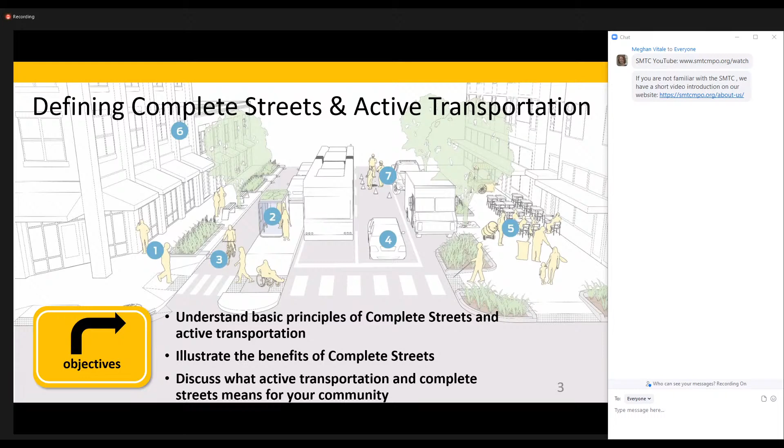To kick things off, let's talk about some definitions here. So what is active transportation? According to the CDC, active transportation is any self-propelled, human-powered mode of transportation, such as walking or bicycling. Now, this is a pretty straightforward definition, but what's interesting about it is where it comes from.

This is coming from the CDC, not the US DOT or New York State DOT, but the Center for Disease Control. And the reason that the CDC is interested in active transportation is because physical inactivity is a lead contributor to many chronic health conditions in the United States, including obesity, diabetes, heart disease, and stroke. Active transportation is a potential solution to mitigate some of these issues.

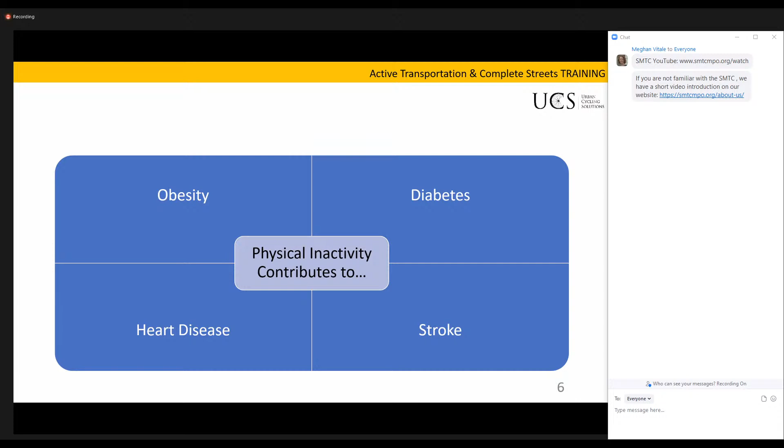If we look at that data, the New York State Comptroller actually did a study of this in 2011 and found that the cost of childhood obesity was calculated at $327 million in associated medical costs. And for adults, that number was $11.8 billion annually in associated medical costs.

And the reason that I bring this up in particular is because sometimes I go to communities and they say, oh, this stuff is all well and good, but we don't have the money. When you see numbers like this, when you see this kind of spending, I say we can't afford not to. And as you'll see later on in the presentation, there are many ways to implement Complete Streets with little to no additional capital cost. So these things don't need to be expensive.

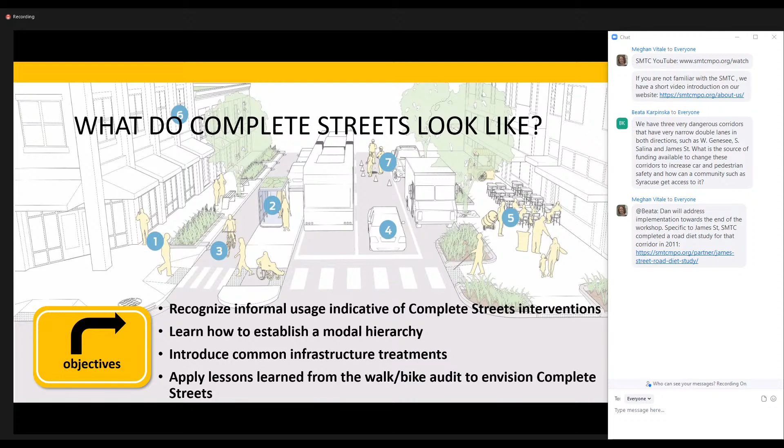So now we're going to shift our conversation from the broad, what is this, to design, and talk about what complete streets actually looks like. So to start things off, before we even get to our menu of design tools, we need to think about how we go about figuring out what that design should be.

If we're thinking about planning a bike network, bikers are very good at finding the path of least resistance and finding comfortable routes. So if you're thinking about a bicycle network development plan, you should talk to your cyclists and understand where they're riding and why.

Every community I go into always has some sort of whispers or urban legends about a project - like, oh, they've been talking about converting that to a rail trail since the 70s, or that intersection over there, everybody avoids it because it's not safe here. There's something to those whispers and urban legends. People are talking about them for a reason, so maybe we should think about them critically to see if there are design changes we can make.

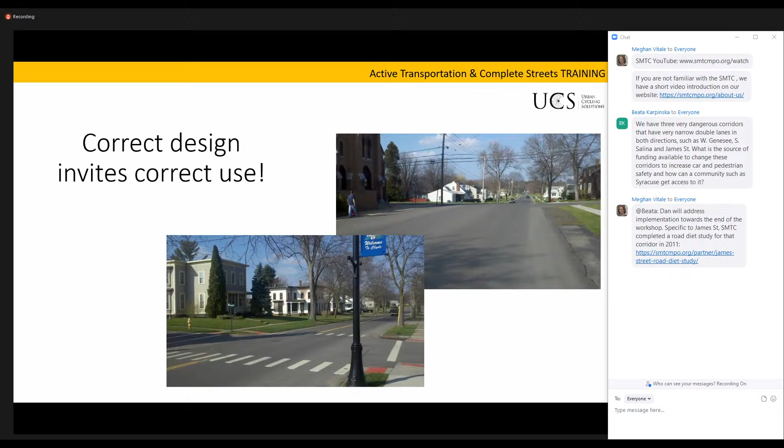In contrast, if we look at this intersection, very clear design. It's clear where pedestrians are crossing, clear where the street ends, clear how wide the lane is for cars in both directions. And it's predictable. That's the whole point of having rules on a roadway—to make the streets predictable so pedestrians generally know what drivers are going to do, and vice versa.

So now we're going to rummage through our complete street toolkit, and look at what design tools we have in there. The first big picture tool is more of a concept, really—it's called a road diet.

For decades, roadway design has really been focused on maximizing space for cars. That means lanes were designed really wide to maximize vehicular flow. But here's the thing—we've realized, particularly in the last decade, that cars don't actually need all of that space. And the trouble is, because of that design, we're creating barriers for other modes. When you have a wide intersection, it makes it a lot more difficult for pedestrians to cross, especially on higher speed roadways. So the concept of a road diet is that lanes can be narrowed to create additional space for other uses, and to create a safer environment for everyone, including cars.

Now, how is it going to make things safer? Road diets have shown to slow down vehicular speed, and this is so important because studies have shown that at 40 miles per hour, if you are hit by a car, there's an 85% chance you are not walking away from that. What's interesting is if you look at a 10 mile per hour differential, it's really dramatic how much the fatality rate goes down. At 30 miles per hour, there's a 45% chance of fatality. But if we lower the speed to 20 miles per hour, you're more than likely going to walk away from an accident. So again, slowing down traffic speed saves lives.

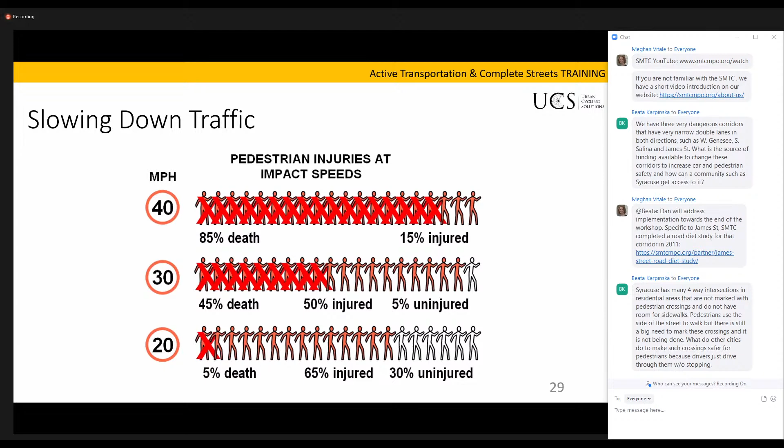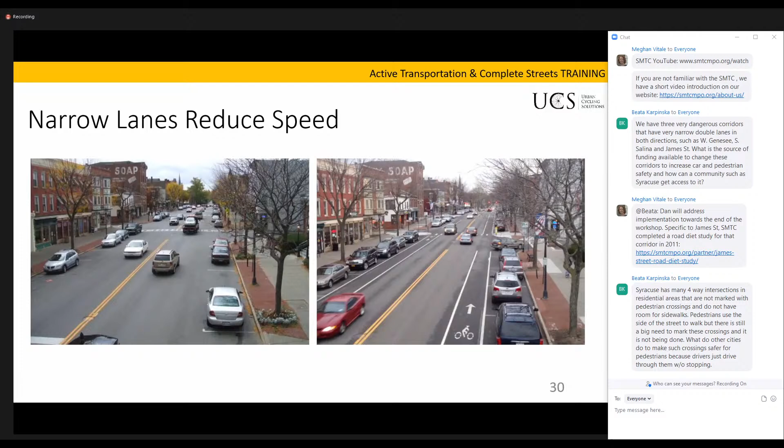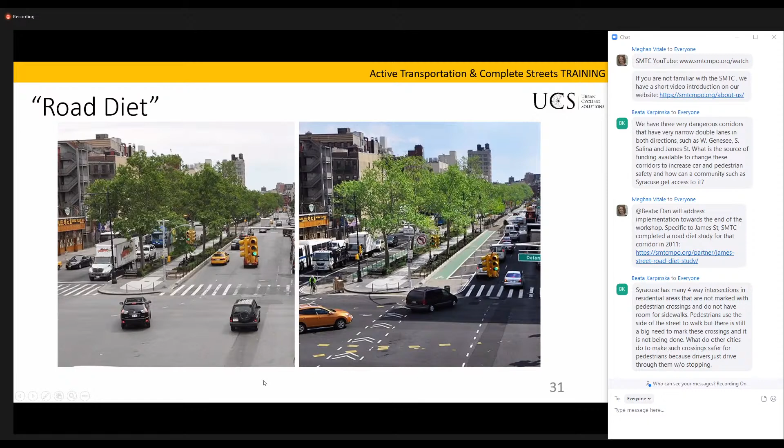Here's a bigger picture example of a road diet—this is Delancey Street in Manhattan. I show you this not because it's necessarily relevant to your particular context, but it's a very clear example of a road diet. Very wide street, ambiguous turning methods, faded bike lane, wide crossing—transforms into a really beautiful crossing with extra space for pedestrians, a protected bike lane, and clear delineations on the street as to where vehicles should be turning. You get the picture here.

So as I said, the road diet was kind of a concept. Now we're going to look specifically at those tools. If we're talking about biking, there's essentially three major pieces of bike infrastructure you're going to see out in the roadway. First is a protected bike lane.

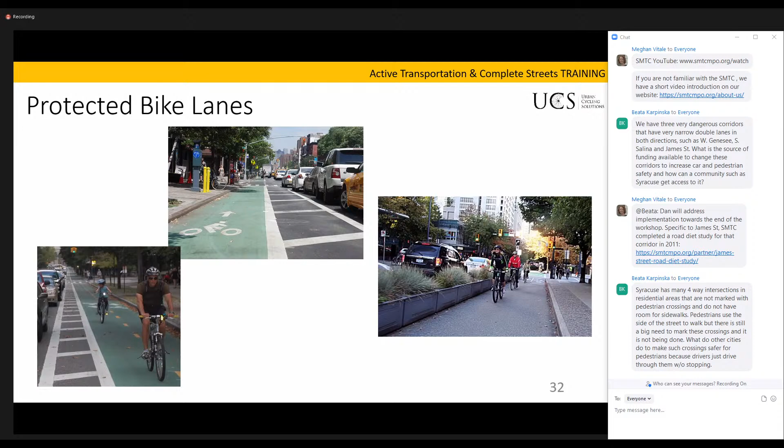That said, it does require a fair amount of space. Typically, your protected bike lanes are going to be reserved for higher volume roadways. What you're more likely to see out there are the good old-fashioned bike lanes, as I call them. Essentially, this is just paint.

It's a painted, delineated space on the roadway for cyclists. If you want to enhance visibility, particularly in high traffic locations where you don't have the space for a protected bike lane, you can fill in the bike lane with solid paint, whether it's green or red. I've seen all sorts of different things.

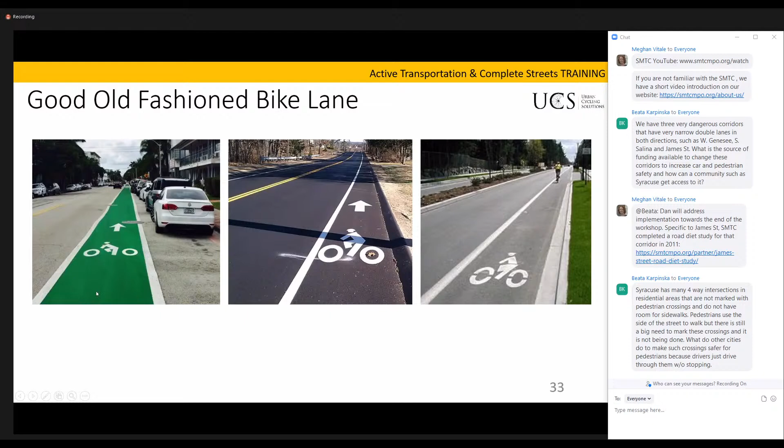The last piece of bike infrastructure that's particularly important are shared routes. Shared routes essentially are exactly what they sound like - roadways that enable cyclists to travel center lane along with traffic. Now, if you're trying to build out a bike network, this should not be the foundation. Shared routes are mainly for connections between different, more robust pieces of bike infrastructure. Typically, you'll see these on low volume roadways where there's either not space for a bike lane or there's not enough traffic volume. So you don't want to use these everywhere.

One other design note: I tend to see communities that use these put them sort of offset from the center of the lane. So if you do need to use a sharrow, as it's called, make sure you print it directly in the center of the lane. The reason for that is if you put this off to the right of the lane, closer to the parked cars, you're creating a dangerous condition for cyclists, because cyclists will tend to follow the sharrow.

So suddenly you have cyclists riding closer to parked cars, which in turn encourages drivers behind them to pass them, which on a double yellow is especially dangerous because drivers are more likely to pass close to the cyclist than cross far over the double yellow. So again, we don't want to create that false sense of positioning. Sharrows should be printed center lane in the roadway if they're going to be used. And of course, sharrows should be accompanied by signage.

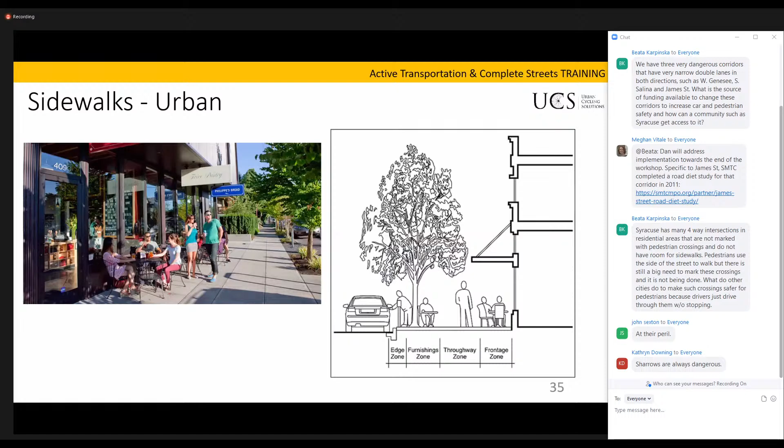In the next zone, the throughway zone, that's where pedestrians are actually walking, so the key there is to make sure that it's clear. And then your building frontage zone is directly in front of businesses - again, maybe this is outdoor seating for restaurants and cafes, maybe stands with goods on them for sale. There's a lot of different things you can do with that frontage zone.

In a more rural or suburban context, you still have the same sort of framework, right? Again, it's not just concrete that we walk on. You still have that edge zone where the curb meets the street. You still have that furnishing zone, but in the rural context, it's more of a curb planter zone where you're going to see grass, trees, plantings, that sort of thing. You still have a throughway zone where we keep pedestrians walking, and then your frontage zone - it still exists, but it's going to look different in this context.

So maybe it's someone's front yard, maybe it's a retaining wall like you see here. There's any number of things, but it's again, another consideration in a more rural context. Maybe there's overgrowth that we need to be concerned about, or another condition that we need to maintain differently than we would a building frontage zone in a more urban context.

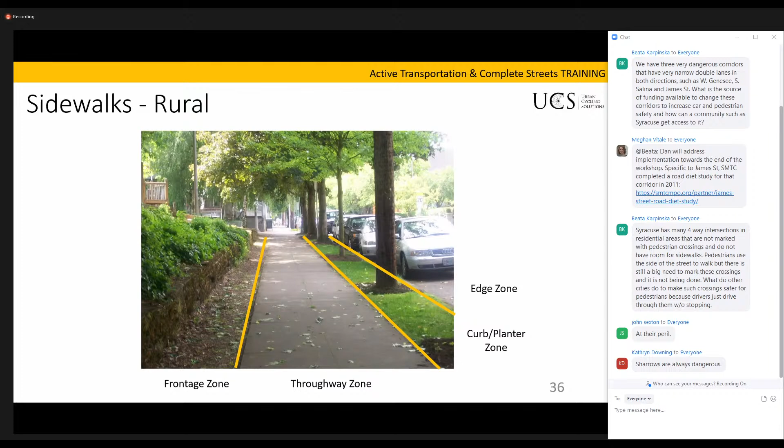In less dense areas, it doesn't necessarily make sense to put in a sidewalk along every curb, which is where shared use sidewalks and side paths come in. These are essentially mixed use trails for pedestrians and cyclists that run along the roadway. This picture is in Rome, where they have a lot of wide open space, but these trails go all throughout the city.

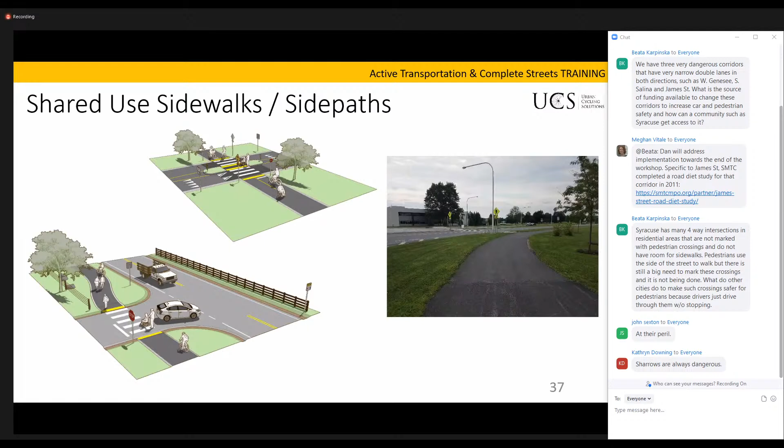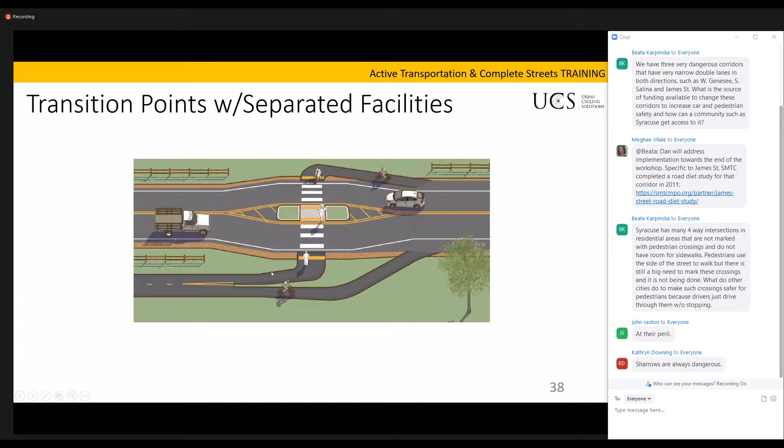One important consideration with side paths is how different users access them. If you have a cyclist on the roadway trying to access the side path, we need to think about what the transition onto the side path is from the roadway in both directions. Similarly with pedestrians, assuming there's some facility here and they aren't just going to an open pasture, how are pedestrians accessing this side path facility?

Curb extensions are a really important tool. Essentially what these do is bump out the edges of the curb, which narrows the roadway and slows down traffic speed. Most importantly, it shortens the crossing for pedestrians. For drivers out there, if you think you're not getting any benefit out of this, you actually are, because this adds protection for parking. Vehicles that could make a sharp right turn and potentially sideswipe or hit a car parked along the curb now have to make a wider turn, so there's no way they're going to turn into a vehicle parked on the roadway.

These can be done the hard capital way or the soft paint way. You see two examples here: concrete, versus just paint and some bollards. What's great about this particular example is that the curb extension actually becomes public space in this context—you can see there's street seating, bikes parked, and people just hanging out.

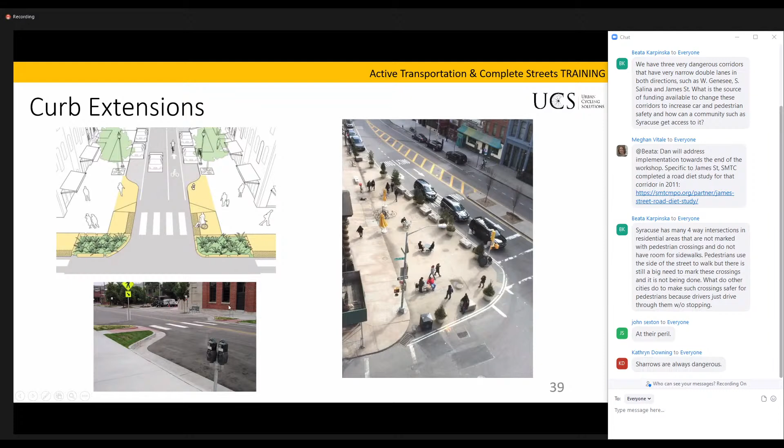Speed bumps, you all know them. The important note here is that there's the hard, capital intensive way, which has actual concrete or asphalt physically bumped in the roadway, or you can get hard rubberized speed bumps that are modular and can be taken out or moved as needed.

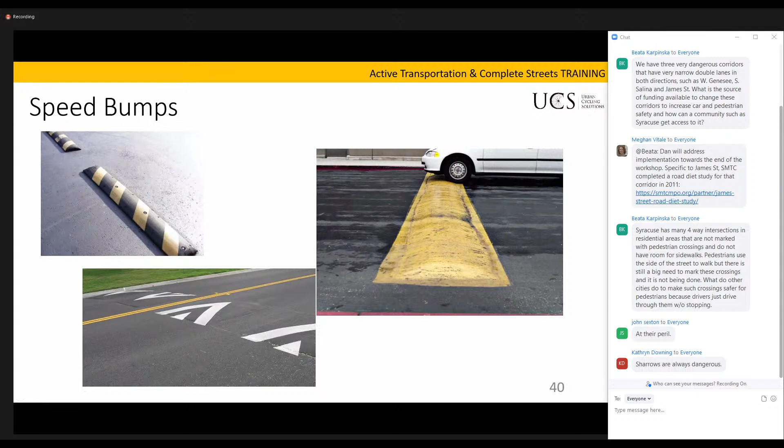Another important consideration is keeping crossings short. People are more likely to cross the roadway if they are comfortable doing so, so the shorter the crossing, the easier it is for pedestrians and especially people in wheelchairs to get across.

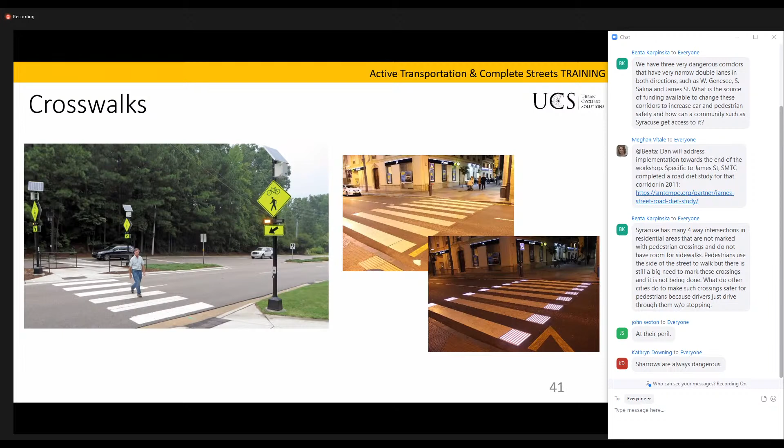There's expensive ways and there's inexpensive ways to do things. On the expensive end, in terms of visibility, this is a really cool intersection I saw in Malaga, Spain, with pressurized sensors in the crosswalk—when you step on them, LEDs light up. As you're crossing, they turn on and vehicles yield, then after you step off they start blinking, and once they're off again, cars will go. But that's fairly expensive—you don't necessarily need really fancy technology to be effective.

Parking's an issue in every community I go into. There's a lot of different types of parking on street—there's parallel parking, and there's also angled parking, but this is disappearing, as most communities recognize it presents too many dangers to drivers, cyclists, and walkers.

What's replacing angled parking is called reverse angle parking, and it's exactly what it sounds like—taking that angled parking and turning it on its head so that you actually back into the space rather than pull into it. This is important because as a driver, you have a full 180-degree view to the left and right of everything going on around you as you pull out of the space.

One thing I'll say about reverse angle parking is that if you do this, it's so important to make the public aware that you're doing this, and to make sure you have regulatory signage that explains how to actually do it. I've seen many different iterations of signs that do the same thing: one, pull forward; two, back up; three, stay in the space.

It's new for a lot of people, so you have to educate before you get rolling, and you have to make sure that there's supportive signage wherever you're doing this.

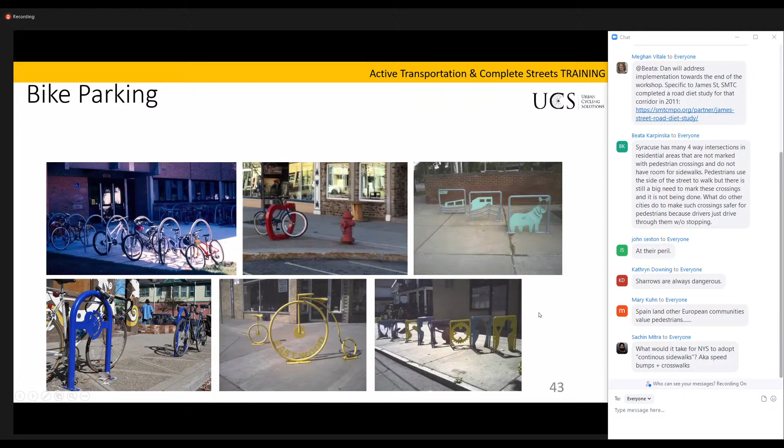You see a couple examples of that here, everything from the plain old U rack to a branded rack in Buffalo to these really funky designs, which I really like. I especially like this donkey here. It's either a donkey or a horse, I'm not sure. Anyway, the ultimate evolution of bike parking is the bike corral.

So essentially, this is taking a parked car, the space for a parked car, and turning it into bike parking on the street. Again, this can be a sort of sculptural placemaking element, depending on how it's situated.

This is sort of tongue-in-cheek, but I think this particular bike rack gets a point across, which is highest and best use. If you think about a car parking space that serves one individual, what's a higher and better use of a parking space? Is it a car for one person, or is it 6 to 8 cyclists? You tell me. Again, it depends on the context, but that's just a calculus to do in your head as you're thinking about this different infrastructure.

ADA accessibility. A core tenet of complete streets, as I've said, is making sure that our sidewalks, our streets are as accessible as possible, regardless of age or ability. Needless to say, we could spend an entire day talking about ADA accessibility and tools, but there are so many things out there. It's exciting to live in a time where we have tools to enable mobility for so many.

But think about people with mobility impairments. Think about people who can't see or hear as well as you can. Think about people in wheelchairs. How do they experience a crosswalk or a sidewalk?

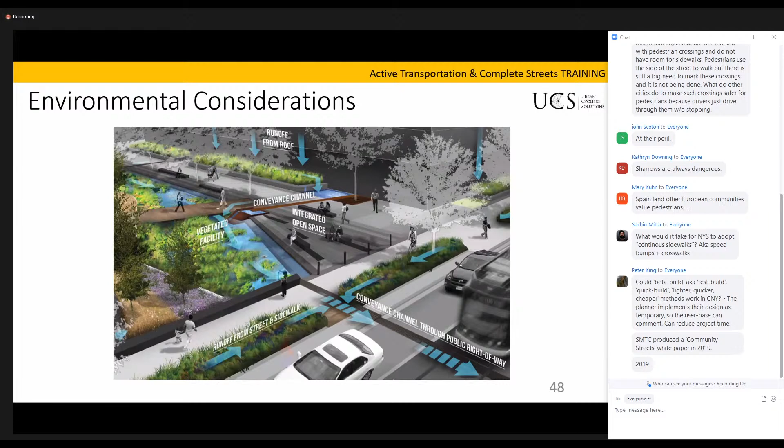Here's another topic. We could spend an entire webinar talking about environmental considerations, but needless to say, there's an entire ecosystem of environmental considerations when we are doing complete streets, everything from runoff to plantings to how much sunlight is hitting our streets and sidewalks. These are things that are really important, and complete streets can help us reduce our environmental impact, number one, but number two, create a streetscape that works with these different environmental factors.

As far as design, we have barely scratched the surface on all the tools that are out there to redesign your streetscape. I would highly suggest you take a look at some of these resources. NACTO has some great guides. If you're dealing with a state roadway or state funded project, you'll want to look at AASHTO guides, like the AASHTO Bicycle Facility Guide, which is typically what states use as their design standard. And if you're curious about freight, NYSERDA has a really great guide about integrating freight, like how you address delivery challenges in different contexts.

Having said that, now's the fun part. Let's take a walk and use some of the tools we just talked about to evaluate a few intersections in your area.

Couple rules of the road here. Typically if we were in person we'd talk about safety, but I think you're all good in front of your computers, so we'll skip that. The second thing I typically talk to groups about when I do walk audits is to think of all users. You may walk down the same street or use the same crosswalk every day, but how is somebody else going to experience that intersection? How is a cyclist going to experience it? How is someone in a wheelchair going to experience it? It's really important to think outside the box and take a walk in someone else's shoes when doing this type of work.

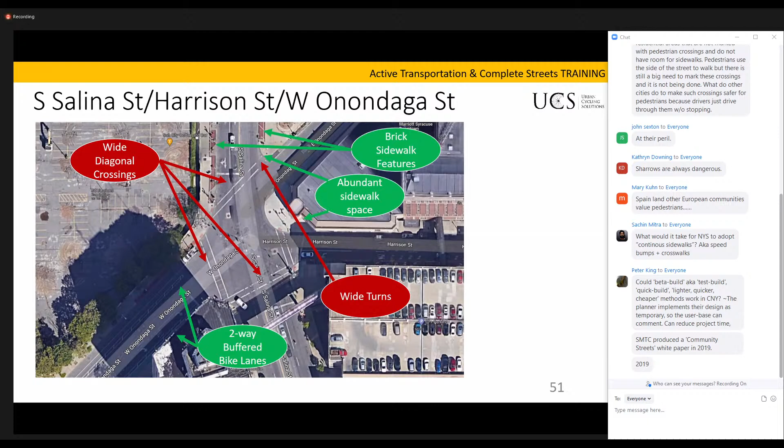So what could we do here? At a minimum, I think shortening some of these crossings with curb bump outs would be great. It would also help us direct vehicular traffic by sharpening some of these turns. When you have more space, vehicles can make wider turns, which is kind of unpredictable, particularly for pedestrians crossing the street.

That said, sorry, we don't need this. One thing I was thinking about: what would happen if we were to put in a roundabout here? It's something that could work. I think it would help direct traffic a little bit better, and it would also enable us to move traffic a little bit more efficiently here.

On Harrison Street, if we did add a traffic circle, we could remove at least one lane of traffic here. You see there's a left turning lane, we wouldn't need that anymore. So we could potentially expand the sidewalk, maybe add a bike lane. There's tons of different things we could do with that space.

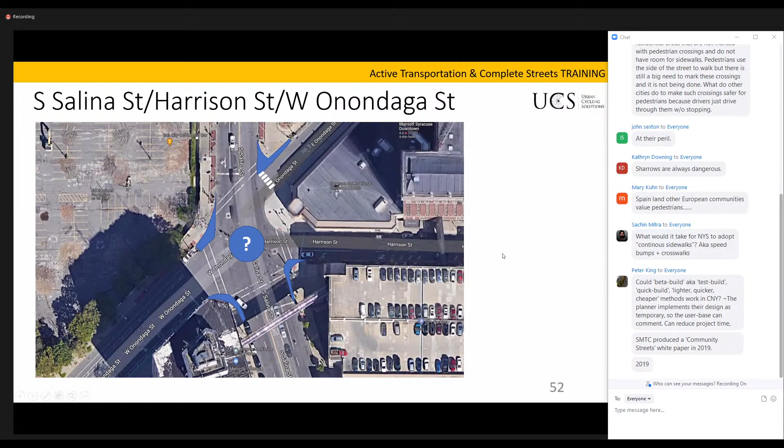Again, this is not me as a consultant telling you what you should do. These are just some ideas that I see based on the existing conditions. Also adding a crosswalk here would be a very easy lift, just to make sure people know they can cross there.

So continuing on Salina Street, this is Salina and Southland Avenue, very different context. If I had to rate this intersection, again, I think this is not the worst intersection in the world. I would probably give this a 3.5, maybe a 4.

What do we have that works here? We have a center median, which I think has a lot of potential. That said, even though we have this center median, it's short, it doesn't intersect with the crosswalk. And as you can see here, these turning vehicles take up a lot of space on the crosswalk as they're turning.

Additionally, there's no walking space on Southland Drive here. You actually see in the street view, somebody walking along the side of the road, not exactly the safest condition. And if you are crossing Salina, there is a single crosswalk. So if you're coming from over here, where there's clearly a lot of parking, you have to walk all the way over here to get across the street.

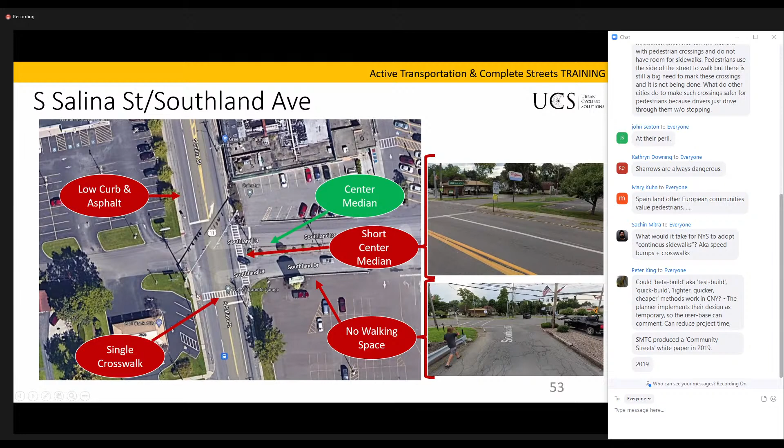So a couple things that might be helpful here. One, putting a crosswalk in on the other side of the street, and then a series of curb extensions to shorten all of these crossings. Most importantly, I think extending the center median is really key, because this intersection is so wide. Think if someone's in a wheelchair, they might not have enough time to get across this crosswalk.

So we have a refuge here where they can hang out while we wait for the light to change. In addition, there is tons of space on Southland Drive in both directions here. I would recommend shortening these lanes to 12 feet, which is plenty of space, and adding a sidewalk on either side. Again, ideas for inspiration.

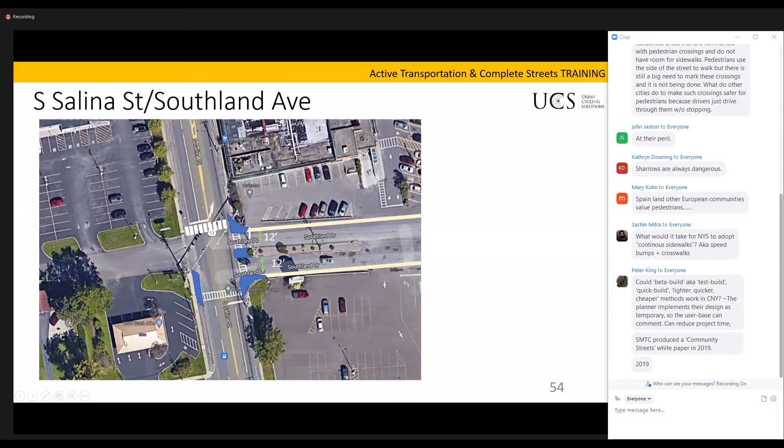So, East Brighton and East Seneca. What do we have that works? What doesn't work? If I had to rate this intersection, I am sorry to say that I would probably give this a 1. I think that's being fairly generous.

A couple issues here. Number one, there's only one crosswalk. There's a lot of use happening over here, there's a lot of stuff happening over here. So maybe there would be crossover between these businesses, but you have to come all the way over here in order to get there.

And when you do, there's no way to get across the street. On this corner here, I know this is a gas station, but it's really unclear if this is walking space or parking space or what's happening here because it's all black, it's all asphalt. So it's not the most exciting or safe or supportive piece of walking infrastructure.

Now, we do have some positives. Why is this not a 0? One, we have an ADA compliant curb ramp right here, which was very surprising. We also have a median here. Now, this is mainly for turning traffic, but this is something we can build on.

So if I were to improve this intersection, a couple things that I would do: again, curb bump outs, I think could do a lot of good here to help us reduce traffic speed and shorten those crossings. But importantly, we need crosswalks here. And I don't think it's a heavy lift to put a crosswalk here and to use this center median to get us to this gas station if we need to go there, or across the street to Dunkin' Donuts.

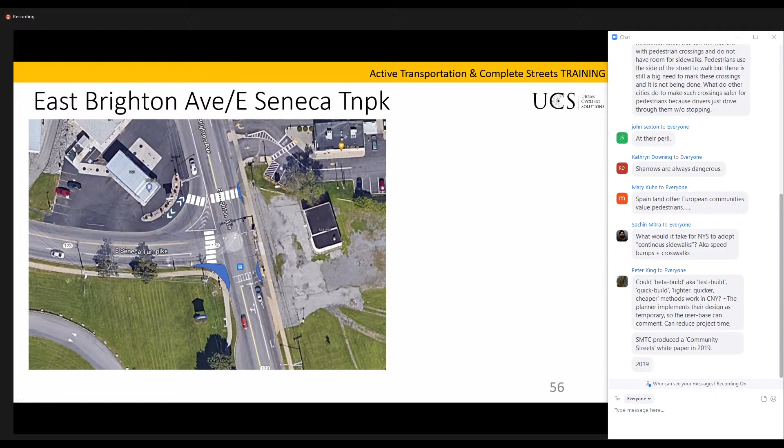So the last area I'm going to talk about is Main Street, North Street, and South Street. I understand that this picture is outdated and there are improvements that have either happened or are underway right now. But just from what I can see, if I had to rate this, I would probably give it a 4, maybe a 5. It's not the worst. It's not the most unsafe thing I've ever seen, and there are some positives here.

For example, there are existing curb extensions, very wide sidewalks, which is great because this is a commercial area. Also, this corner here is daylit, meaning as a driver approaches an intersection, their view is not obstructed by parked cars. The parking has been moved from the corner so you can actually see what's going on as you're approaching an intersection.

At the same time, there are challenges here, clearly. One is crosswalk placement. I get it that there's some geometry issues here, but in order to cross the street, you sort of have to go all the way over here, or all the way over here to get to the other side.

This is a little pet peeve of mine, so take it with a grain of salt, but I hate it when I go to a community and there are different crosswalk designs. It's just not a consistent experience for pedestrians. You see here, you have the double bar here, and then the step ladder here. Let's keep it consistent. Think of yourself as a pedestrian. We probably intuitively know we can cross at both locations, but if it's consistent, it feels connected, and it's better.

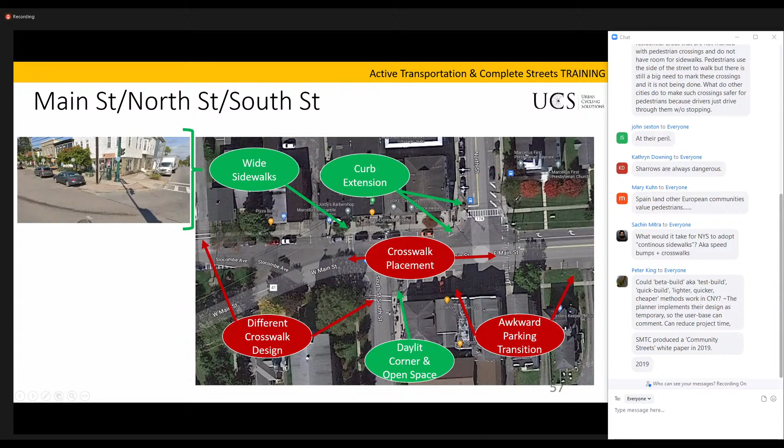That said, here are some small improvements: a curb extension here to shorten this particular crossing, a curb extension here where this crosswalk is, putting in a new crosswalk here so it's a little easier and more efficient to cross the street, and additional bump outs here.

I would also consider, and I believe this is what happened, converting this into parallel parking so there's a consistent parking experience, and so we have more space to maybe put some street seating out for the brewing company here. There's a lot we could do with the space that I think is being wasted now.

That's our walk audit. Again, that is not me recommending specific design improvements. That's just sort of talking through what possibilities are out there to address challenges that we see.

So for the remainder of the webinar, we're going to talk about policy right now. We're going to get to implementation, and then we're going to round things out by talking about performance management. But I'll pause—Megan, was there anything from the walk audit, or anything particularly relevant, that we want to address before I plow through the rest of the content here?

Can you hear me okay? Yes. Okay, I didn't get any questions specifically on the walk audit, but we did have a few questions earlier. One was about speed bumps and crosswalks, so maybe it was about raised crosswalks—I don't know if there's anything you can say about that. There was also a question about crosswalks, or how to cross pedestrians safely at intersections that might not have sidewalks, maybe in a more suburban context.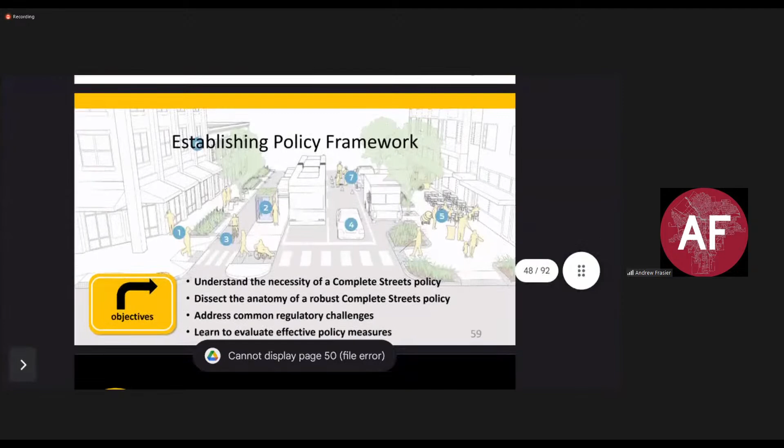So why do communities need a complete streets policy in the first place? Well, a complete streets policy is important because it represents an official mandate to work toward an integrated transportation network for all users, and to establish a reporting framework to keep track of these initiatives. So one of the things that's really important with a policy, if it's well written, you can start to codify that design step ladder that we talked about earlier.

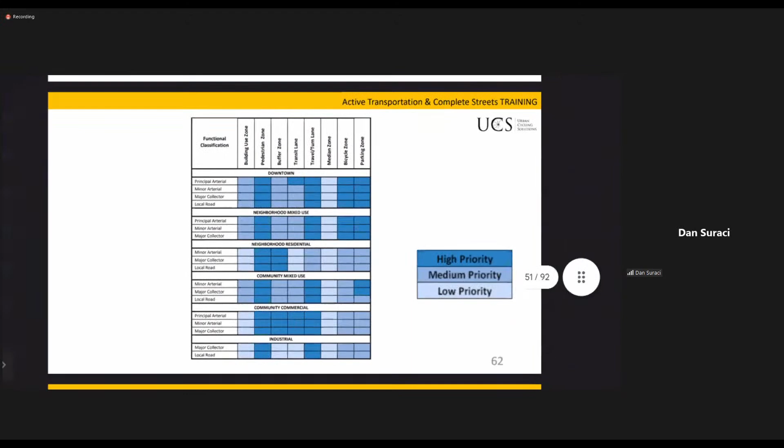For example, this is from Albany's Complete Streets Policy and Design Guide. Essentially what they do here is indicate where their highest priorities are in terms of investment. In a downtown context, in principal arterials, they prioritize pedestrian zones, turning lanes, bicycle zones, and parking zones. This is something your complete streets policy can codify so it's easier to make decisions about design.

Scope of applicability is how this policy is applicable. What does it apply to? Is it new projects? What stakeholders are involved, et cetera? Projects and phasing just indicates where the complete streets policy comes into play. So is it retroactive? Is it looking at all new projects moving forward?

Exceptions are where a lot of policies tend to fall flat on their faces. You want to make sure you have a very rigorous process in place for exceptions to your complete streets policies, because if it's really easy to get an exception, every developer, every municipal investment is going to try to get one. Commitment to an integrated transportation network means thinking about projects in a larger context, so you're not just going to put an ADA compliant curb ramp in the middle of nowhere. We're going to think about investments that build off our transportation network and create connectivity for everyone.

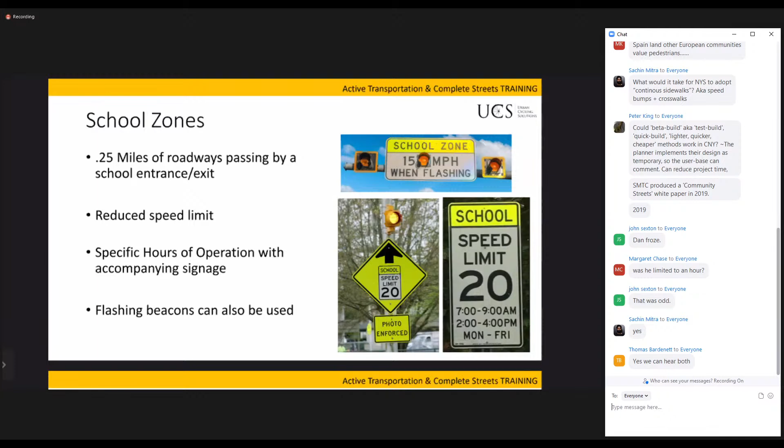One thing you can do with your complete street policy is create design packages. A school zone, for example, is something you can bake into your policy and say, if a roadway meets these criteria, then we will deploy these infrastructure solutions. The state DOT has a formula for school zone implementations if you're on a state roadway, but locally you should be thinking about what sort of design treatments you'd want to bake in so you can deploy them based on specific criteria without worrying about additional red tape.

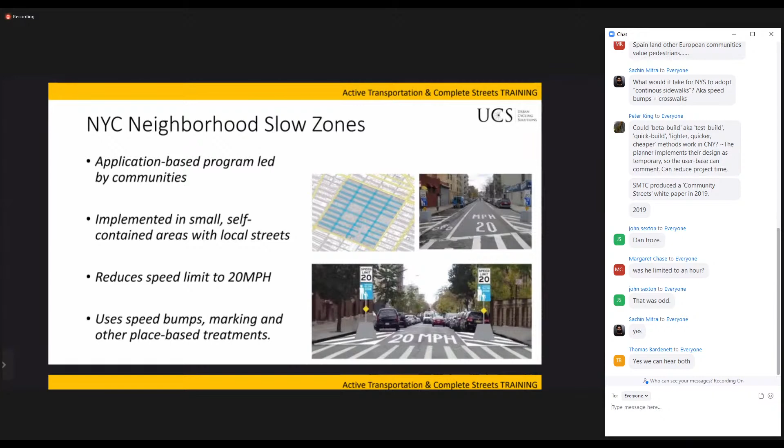This is an example from New York City. This neighborhood slow zone basically says, okay, in a 5x5 block radius, here are design tools we can implement to make a specific area more bicycle and pedestrian friendly.

For some tools and resources, Albany's Complete Street Policy and Design Manual is really well done. Smart Growth America's local policy workbook can also help you think through the different pieces of a complete street policy and develop your own. So, implementation.

Your Department of Public Works or state DOT might control that roadway. Your transit agency is going to be operating on it. You've got a chamber of commerce that's really interested and concerned about what's happening in front of their businesses. And then you have a very diverse group of stakeholders, from young people to the elderly, someone in a wheelchair, bicyclists. This gets really complicated when we're starting to think about how we achieve this vision.

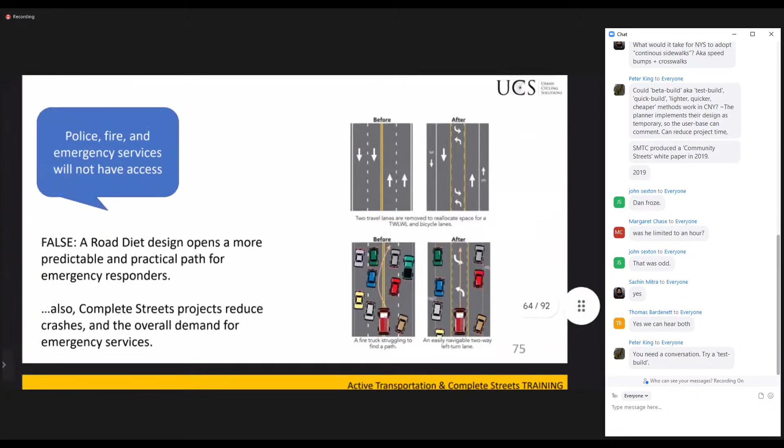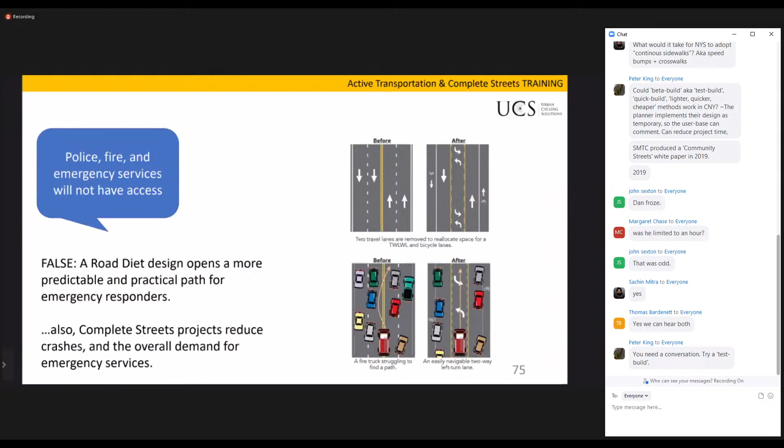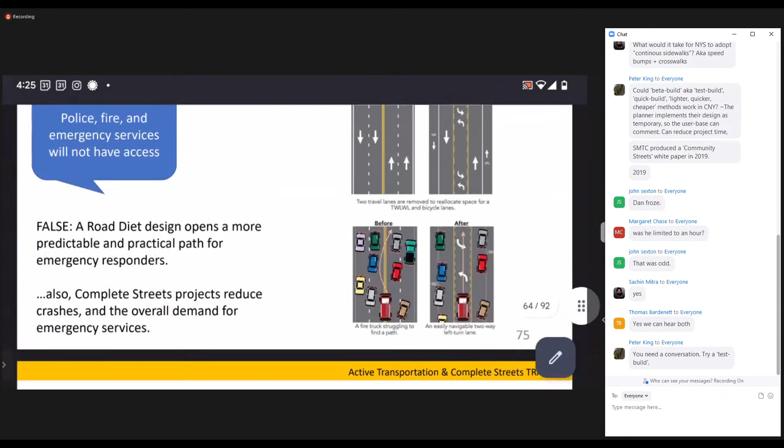So I often have emergency services really concerned about complete streets. But the truth is that if you do a road diet correctly, you can open up the street to make it more predictable and provide additional space for emergency vehicles. You see a great example of that here, where this new turning lane suddenly becomes an emergency lane. I would also say, yes, this is sort of anecdotal, but if you are doing complete streets well, theoretically, you are reducing traffic accidents and reducing the need for emergency vehicles.

We don't have the money for this. Well, as I've just shown you, you don't necessarily need to spend a lot of money, especially if we're talking about tag-along projects, to implement complete streets.

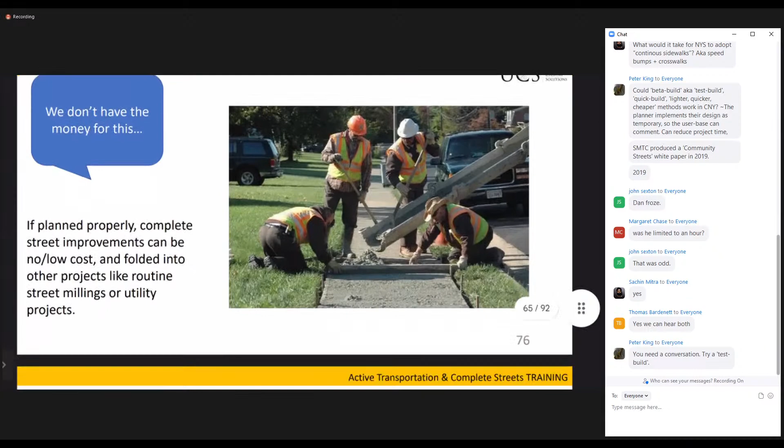It just won't work here. Our community is too unique, or we're not Portland or New York City. Well, it's those unique elements that make complete street projects special in any given community. We talked about placemaking earlier. Capitalizing on your community assets is what makes complete streets work.

So, jumping back to money for a second, I don't want to spend a lot of time on this because we're short on time, but there's a lot of federal funding out there. There are state funds out there, and there's also private funding out there to fund complete streets. Generally speaking, when it comes to private funding sources, you're never going to get property owners to give you cash, but you could potentially get a landowner to give you an easement for, say, a trail or a sidewalk.

Businesses also won't necessarily be the first people in line to invest in complete street infrastructure, but if you can demonstrate value to the business, either the employees or the customers, you might be able to move the needle. So, for example, putting in a bike corral in front of the cafe, maybe they won't necessarily pay for it, but in New York City, for example, if there's a bike corral put in place, New York City DOT will work with the businesses as maintenance partners.

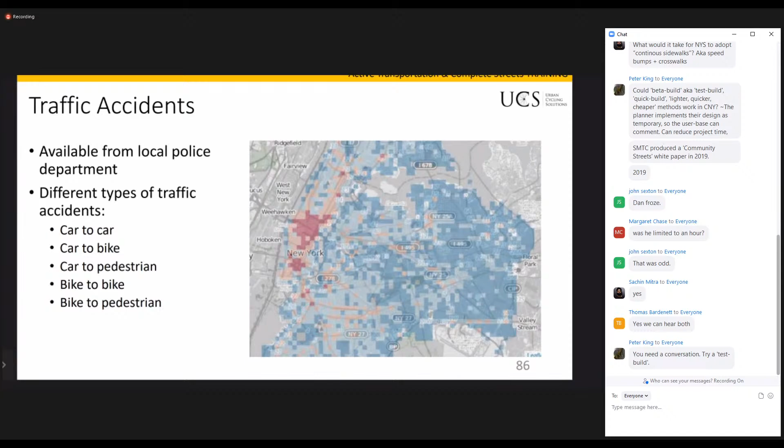So shorter-term metrics: first, traffic accidents. You can always get this from your local police department at varying levels of granularity, but it's always out there—it's a very common metric. Traffic volume is the number of bikes, cars, or pedestrians on the street. You can also look at vehicle turn movements. There are a lot of different traffic volume measures out there.

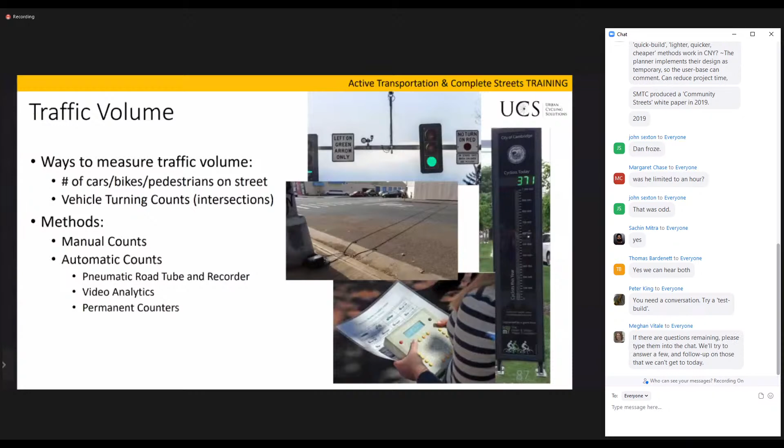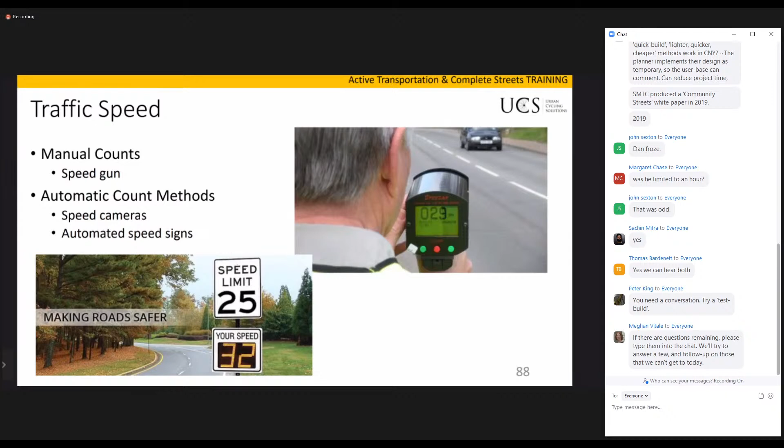Traffic speed—again, you can sort of get this tangentially from your police department by looking at instances of speeding violations in your community, or you can send somebody out with a speed gun to measure speeds in a specific area if you need to.

When it comes to economic vitality, there are a couple things we can measure for commercial activity. Businesses aren't necessarily going to share their revenue, but looking at sales tax receipts in businesses abutting complete street improvements can help you get a sense of increased commercial activity.

You can study business engagement through surveys of people using businesses, or surveys of business owners. You can also just go out on a Saturday night and count how many people are in street seating in your downtown commercial corridor. As far as commercial vacancies go, this is really important because it tells us whether businesses are active and interested in being in our community. So looking at building permits and the number of vacant storefronts are key metrics.

Downstream outcomes are things that don't necessarily change year over year, but we want to study long term. For public health, think about asthma and obesity rates. For public safety, it's interesting—crime rates can go down relatively quickly, but perceptions of safety take time to change, so keep that in mind. For environmental outcomes like air quality and water quality, unless you have a COVID-level event where people suddenly stop driving, these things take quite a while to demonstrate impact.

There are a lot of tools and resources out there. I will provide these in a bibliography after the training, but there are lots and lots of KPIs to measure.

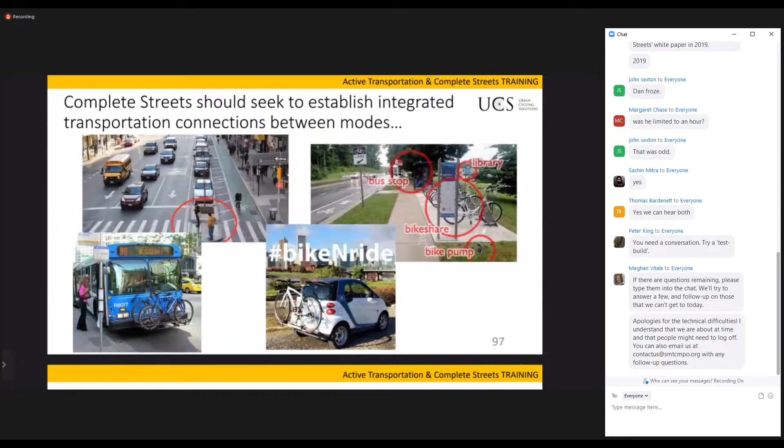Quick review: active transportation is any self-propelled, human-powered mode of mobility. Complete streets are streets for everyone. There are many, many tools out there that we didn't even scratch the surface on—I suggest you look at the design guides I mentioned earlier, which will be in the bibliography I provide. Complete Streets should establish an integrated transportation system that connects different modes and enables optimal transportation choices. Don't forget about freight mobility—it's important.

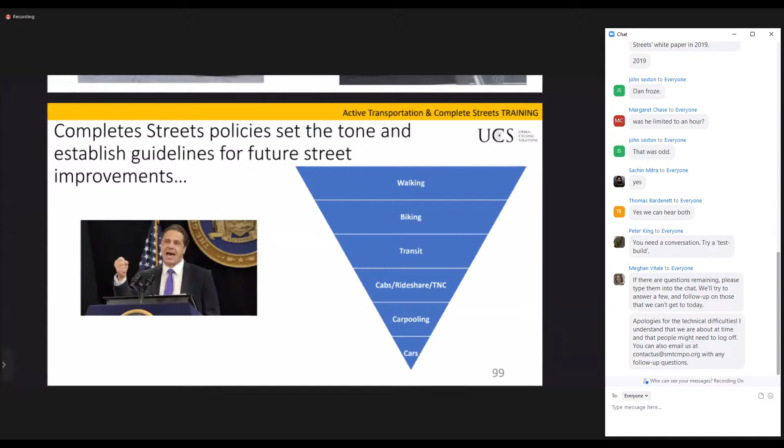Implementation is complicated, but can be streamlined with cooperation and education of different stakeholders. And lastly, evaluation is really critical to tracking success and setting community goals.